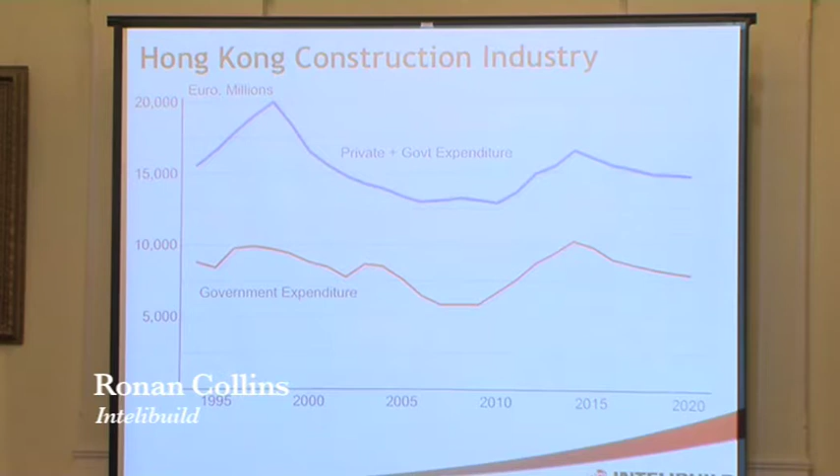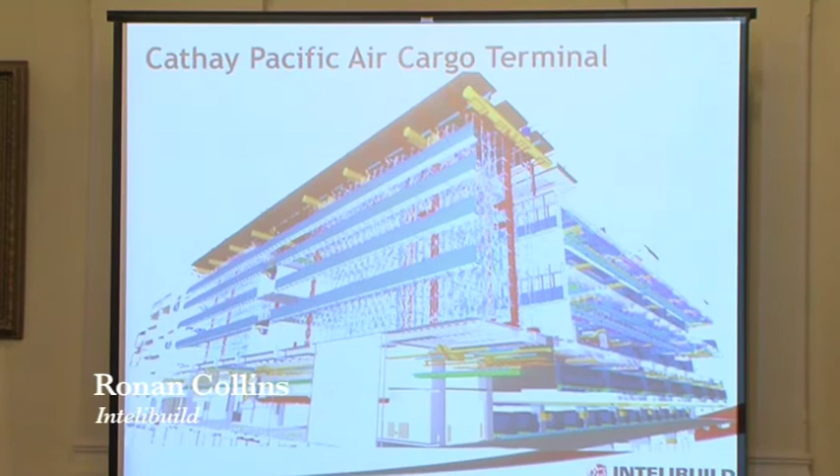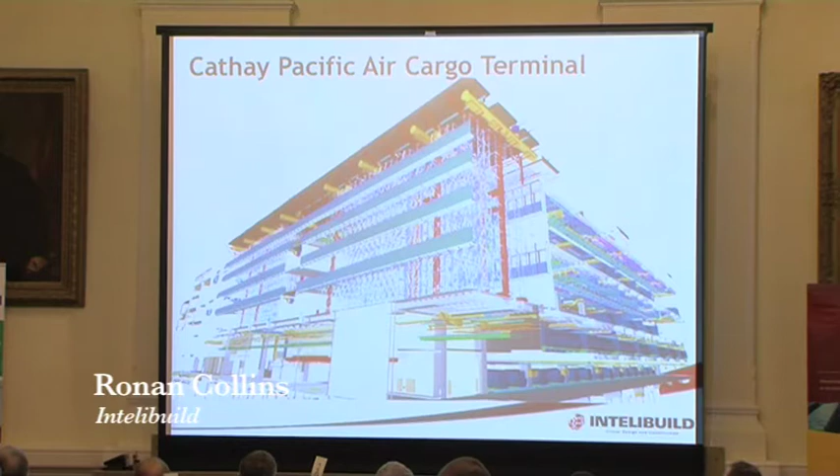So what I'm going to do is share with you how BIM started in Hong Kong, how we've ended up at an Institute of BIM, and some lessons we've learned along the way. A project that will feature heavily in this presentation is the Cathay Pacific Air Cargo Terminal, which was instigated by the client. A key message from this morning is that BIM adoption needs to be driven by the clients - it's got to be led either by the client's project management team, but definitely from the top, to get the most success.

So I'll talk more in detail about the Cathay Cargo job. This is another building which we worked on, called the Goodman Interlink project - it's a 1.2 million square foot logistics warehouse.

So it's used to sort out cargo coming in from the container port and distribute it to airlines around the city to other ports. The client drove the BIM process. This was a little bit different. The client asked a company to provide an independent BIM model.

So the design team continued to operate in a traditional two-dimensional way. The architect did 2D drawings, the engineers did 2D drawings, and then an independent BIM model was created to check what was on those drawings. So it was effectively a coordination check.

So in some projects we find the owner says the architect, the engineer, the contractor must drive the BIM. And on some projects we find that the owner says, okay, that's going to be too difficult, we'll do an independent model as a check on the design coordination.

This is another example. This is a commercial development for a retail center. And again, this was a client-driven initiative. The client had seen other successful developments and said, oh, I'd like to have that.

So we have in Hong Kong what I call the Gucci handbag effect. One developer gets one piece of software, for example, they work with a Gehry Technology platform, and one owner gets immense benefits. So the next owner says, well, I'm developing my new project, I want my Prada handbag, so they go and use a Revit platform. And the next guy goes, no, I need a different handbag, so he ends up with another type of handbag.

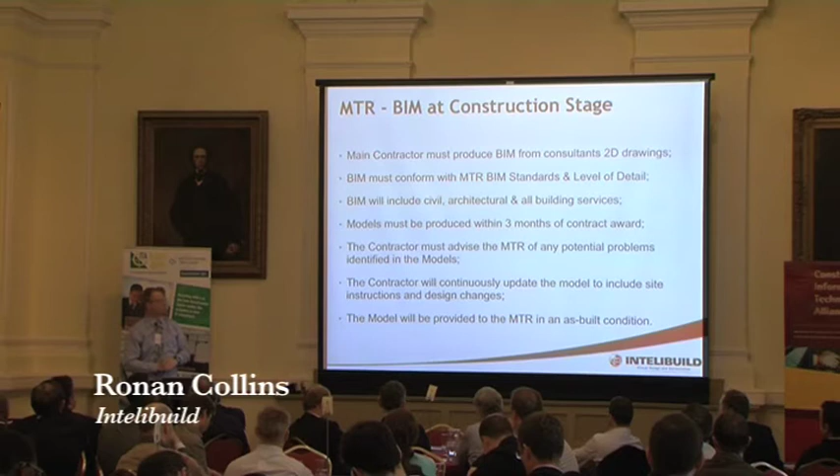The Hong Kong Airport Authority is also looking at BIM. But the Airport Authority have been lucky enough to have a little bit more time in their planning, and they've taken the initiative and said, for our new terminal, the design consultants will operate in BIM. So the Airport Authority, 2.5 years ago, signed a consultancy agreement with Mott MacDonald, Arup, and Aedas Architects for the design of a new airport terminal, and they have to do everything inside of BIM.

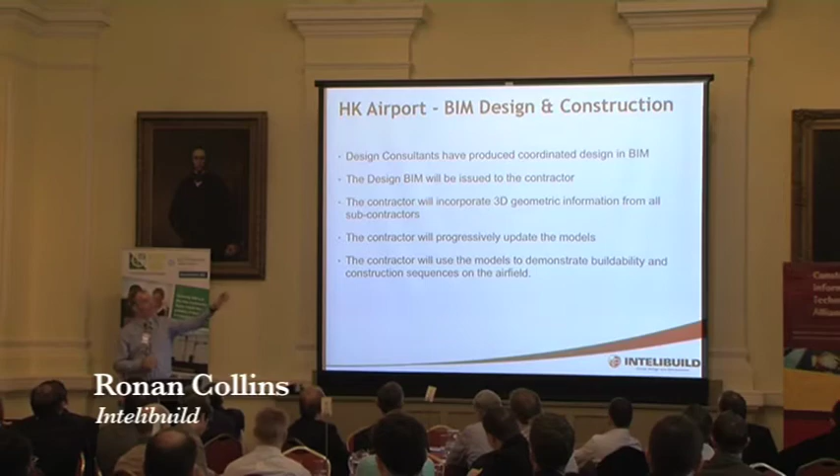A couple of weeks ago, the contract for the construction was awarded. And in the contract for the construction, the Airport Authority have said to the contractor, the design consultants have produced a coordinated design model. So the Airport Authority have driven the consultants to produce a coordinated model. So in Hong Kong, the culture in Hong Kong is very simple: the engineers do a scheme design, the contractors start work as quickly as possible, and the M&E contractors do a lot of coordination on site.

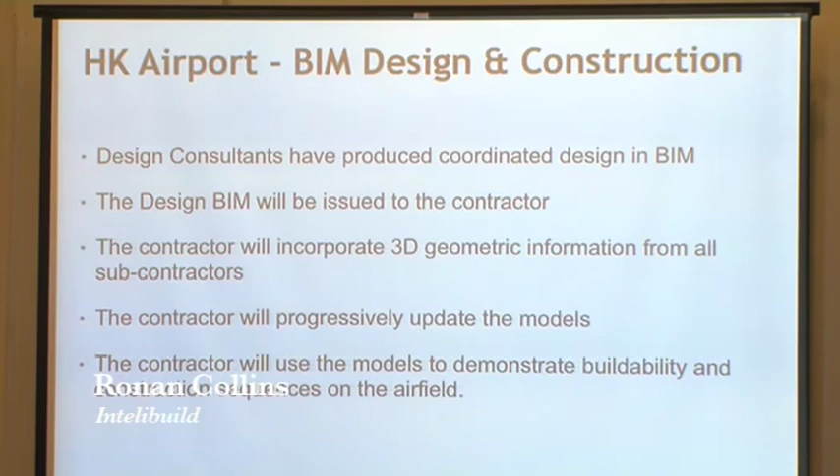The Airport Authority have said, that doesn't work. So we want the E&M coordination done in the design. We're willing to pay for it. We want to use BIM. So they've driven a BIM process for MEP coordination. And then they've said to the contractor, we'll give you the model. Mr. Contractor, we're giving you the model. You must keep it up to date.

So all of your subcontract information, all of your suppliers' information, all of your details from manufacturing must be put into that BIM model. And at the end, you have to give the model back to the Airport Authority. So the Airport Authority will end up with an as-built 3D model of a new airport terminal. They've also said, for the purpose of maintaining and operating the airfield, the contractor will use the models to demonstrate the buildability and construction sequences on the airfield.

So one of the requirements in the specification is, it's not just good enough to show us the pipes fitting in the building. We want to see the delivery of the materials. We want to know when you're going to close certain taxiways. We want to see where the cranes are going to be positioned. We want to understand the whole logistics using the BIM model.

So in these examples, the owners, or semi-private owners, are telling the contractors or telling the architects what they want. And it's driving the industry. So it's not an architect coming along going, hey, we're going to do BIM. It's the industry going, we need to get it done across the board, and changing the whole thing.

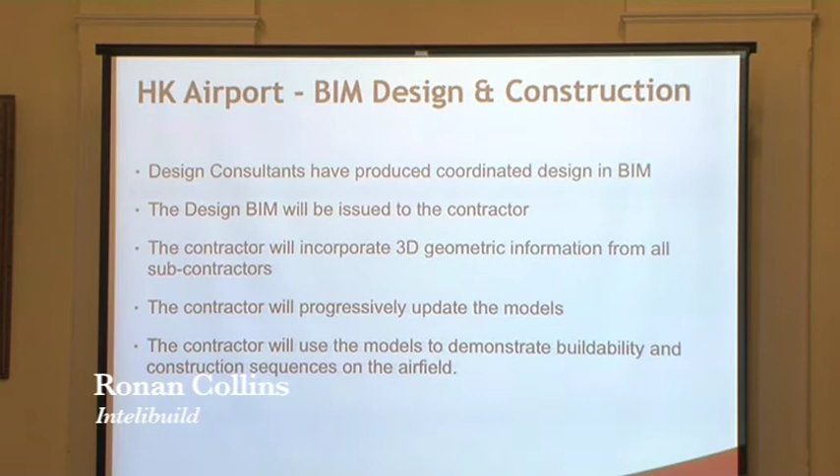And the biggest mover in the industry is the Housing Authority. So the Housing Authority is led by a lady called Miss Ada Fung. And Miss Ada Fung is the first honorary member of the Hong Kong Institute of BIM, because she has solely driven the idea of BIM into the Housing Authority. In Hong Kong, we have 7 million people of a population, and of that population, about 1.8 to 2 million people live in public housing. And these are some typical examples of public housing blocks.

The Housing Authority, on their website, have published their own BIM standards, their own user guides, their own guides for producing components, and their own systems for actually making the models. So the Housing Authority have made it public. We're going to use BIM on all of our projects by 2016. They've created the standards for people to follow, and they're driving the process.

So now all the architectural firms, all the engineering firms, all the M&E firms, all the contractors are all starting to learn BIM, because they have to meet the requirements of the Housing Authority. So they're all trying to learn what BIM is about, how does it work. So we have all these major owners getting into BIM in Hong Kong. So there's a change, a cultural change, a social change happening.

But everybody starts asking the same questions. What is BIM? What does that actually mean? What does a client mean by BIM? How do we implement it? How do we actually make it work? And when do we start doing it? And who's going to manage this process?

So myself and a number of my colleagues in Hong Kong have created and have built up an independent institute called the Institute of BIM. The institute is modelled on the Architectural Institute. So we followed the Hong Kong Institute of Architects template in terms of membership structures, articles of association. It's a registered institute. And we actually have professional grades.

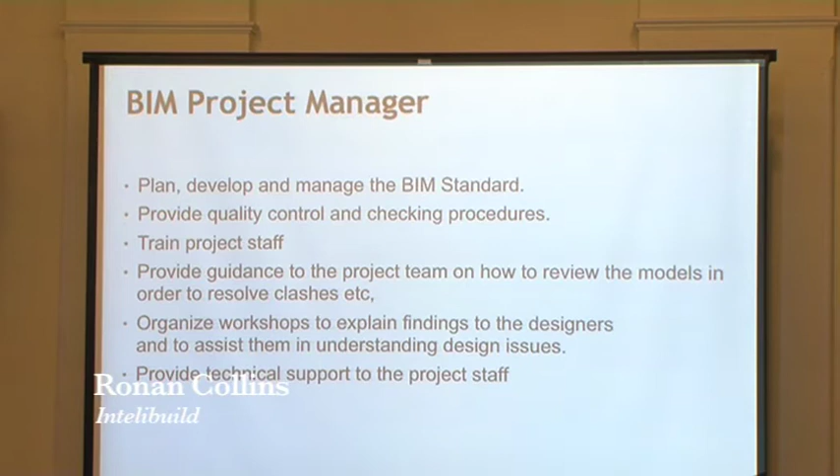Then this guy, the project manager, has to provide guidance to the project team on how to look at the models to resolve clashes, actually go through the process of coordination, organizing workshops, assisting them in understanding design issues, and then providing technical support. Inevitably, there's going to be technical problems. So this is the role of a project manager.

And this fits nicely into the idea that I've put forward in this paper, that there's three key issues in the technology or the implementation of BIM. The first is the people, and that's the most important. The second is the process, and the last is the technology. I'm not going to talk about BIM software or hardware. It's been murdered to death on numerous occasions by all the software vendors about how wonderful their technology is. What we have to focus on is the people and the process. And the people comes back to the training.

So here's my take on the construction industry in Hong Kong and probably in Ireland. We operate in silos. So the architect has their domain, the structural engineer has their domain, and so on and so forth. For BIM to work, we need to collaborate. And I've taken two quotes. The first quote is from Charles Darwin, which is a very old quote, but this is actually in the 2012 UK BIM report. So they've done an analysis in the UK of the adoption of BIM, and this is on the last page of that report. Collaboration is key.

In the Journal for BIM in the US, Turner Construction have said that collaborative project teams have the potential to lead the way in defining the standards for a cost-effective, predictable project delivery. The key benefit to BIM is knowing what it's going to cost and knowing when it's going to get delivered. That's the key underlying benefit of BIM. So you have Charles Darwin from the 1800s and Turner Construction from the 2000s talking about collaboration.

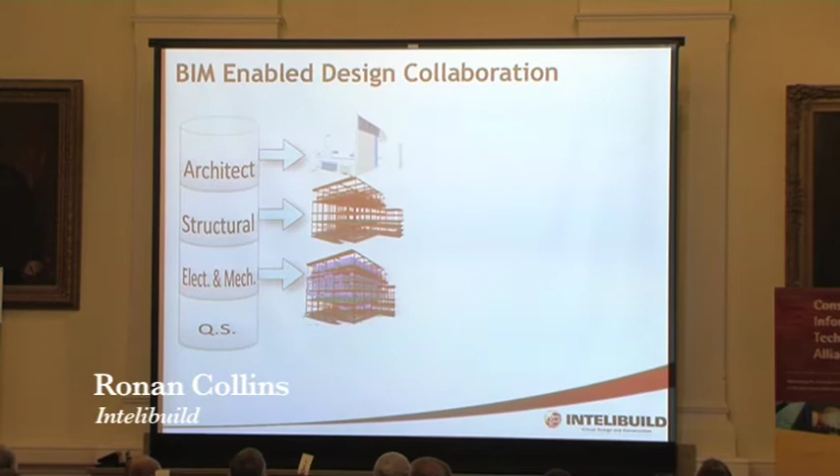So how does BIM enable collaboration? You first of all have to have a contract which enables collaboration. BIM will not work in a traditional risk litigation style contract. So if you're in a contract which is do the least amount of work and shed the maximum amount of risk, BIM is the wrong system. BIM is not going to create a collaboration environment.

If the contract is written in some collaborative manner in terms of partnering, sharing, alliancing, IPD, whatever you want to call it, BIM will enable that process. But BIM will not create the process. So if you have an argumentative style agreement, BIM is not going to fix that problem. But if you have a collaboration style agreement, BIM can enable that process.

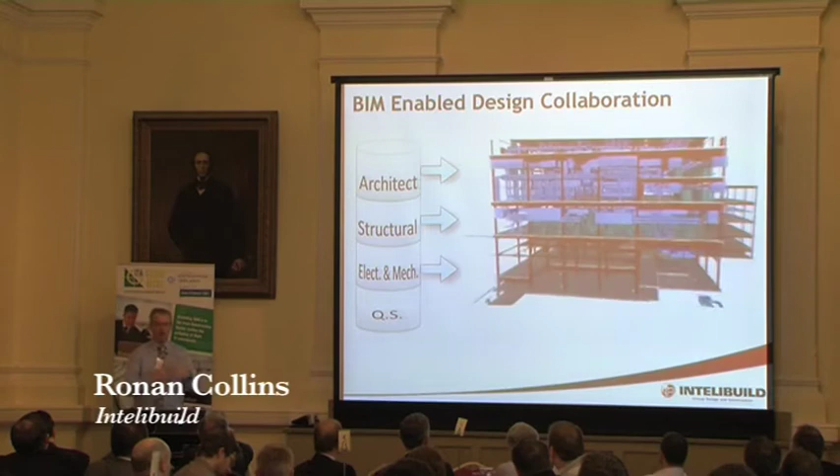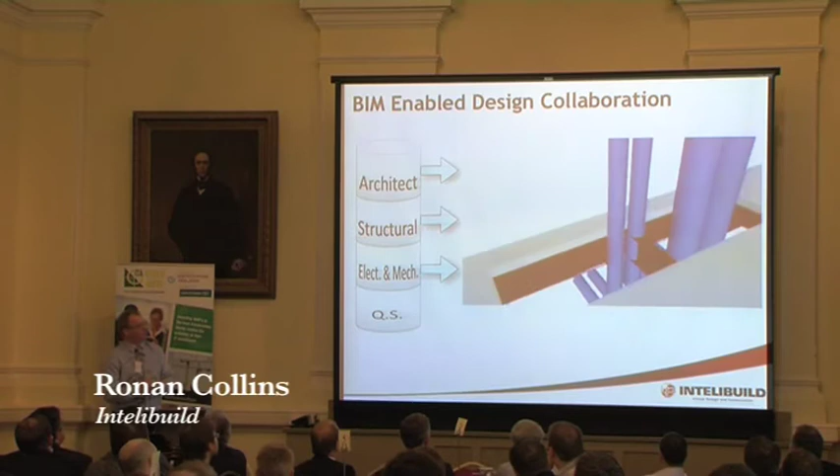So when we start doing BIM, we want the architect, the structural, and the electrical to collaborate. So we want them to build their own models, but then we want them to look at the models and start solving problems. So this is an example of a power plant or an energy plant. And it's showing simple things like a pipe clashing with a beam. This is stuff we see every day of the week, every job we work on. The next example, with the camera flying around, is a piece of ductwork hitting a column.

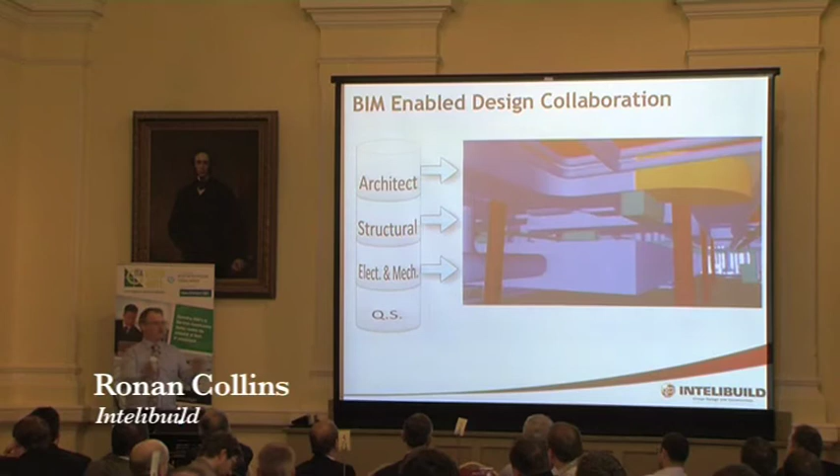Okay? In a collaboration style arrangement, these guys have to solve these problems. But what we're finding is they're not looking for the problems. So one guy is making a ductwork model, one guy's making a steel model, one guy's making an architecture model. I'm done. I've made my models, I'm finished. But who's actually looking at the coordination? Who's actually looking at the collaboration? So we have a very interesting lesson that we learned.

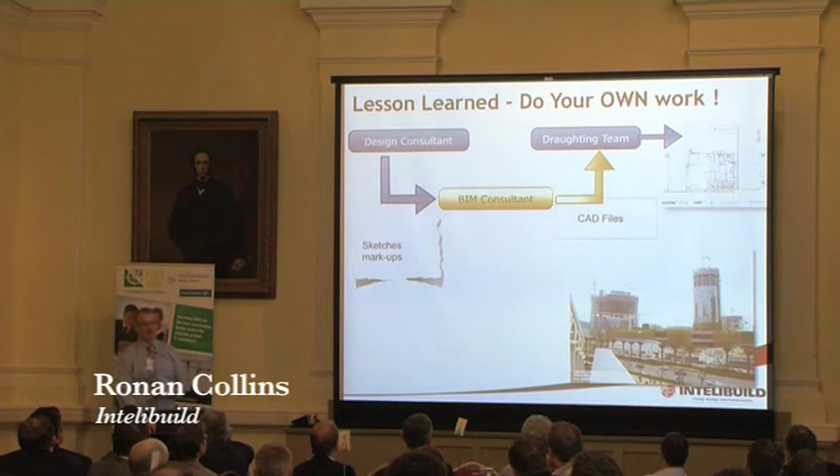So you had the situation where you had the designer, an external party, and then the drafting team for the same designer. You can imagine what happened. When these drawings were late, who do you think the architect blamed for the late delivery of the documents? It wasn't the designers. It was the poor donkey driving the BIM authoring software. So the experience that we had on this City of Dreams was we were trying to get involved as an independent company in the procedure of an architect generating drawings, because they couldn't get up to speed on the software. Oh, it's too difficult to learn, it's going to take too much time to figure out, it's never going to work. So the learning is never put a BIM consultant between an architect and his drawings.

The architect has to learn the technology, and the architect has to produce his own drawings. And the same stands for the engineers and the MEP engineers. If you want to appoint a BIM consultant to enable them, let the BIM consultant do the training, let them provide technical support, let them second staff to the architect's office, and let them do planning for the actual BIM works, but do not let the BIM consultant be responsible for the production of the drawings, because the BIM consultant will go bankrupt, which is what nearly happened to us.

So, you've got the people, now you have to figure out what we're going to put into the BIM model. In terms of change management, or in terms of process management, you have to rethink how you design and document a building. Okay, the days of getting a drawing rushed out on a Friday afternoon to meet a tender deadline is not the right way to work a BIM model. You cannot rapidly produce these 3D models. It takes time, it takes effort. So what we say is you have to define what is in this model.

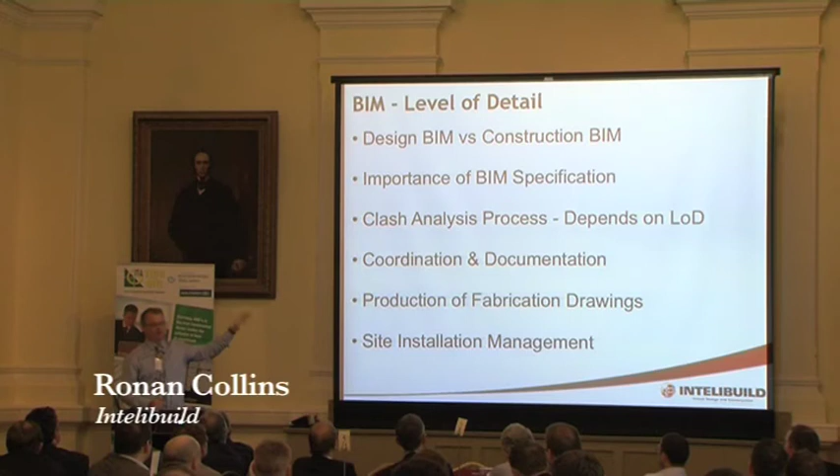So when we started this project, the Cathay Pacific cargo terminal, to give you a sense of scale, there's 2.6 million tons per annum going through this cargo terminal, or there will be next year when it opens. A cargo plane carries 110 tons of cargo. And here was the learning I had on this contract. Every time you go on your holidays, there's 20 tons of cargo on top of all your baggage in the plane. So every airline operator is moving cargo on every single aircraft.

So this aircraft terminal will deal with 75 flights per day. So the air cargo terminal is designed for these numbers. Okay? It's not an architectural masterpiece. It's not a structural engineering phenomenon. It's designed to handle 75 flights per day.

Same image as before. The client wrote 3 lines in the design specification. The design team must use BIM for the coordination of the air cargo terminal. Full stop. Please submit a BIM plan with your tender submission. Full stop. That was it. There was no specification, there was no project plan, there was no level of detail, there was nothing. 5 years ago. There was an aspiration from the client to use BIM. And they had no idea how to make it work.

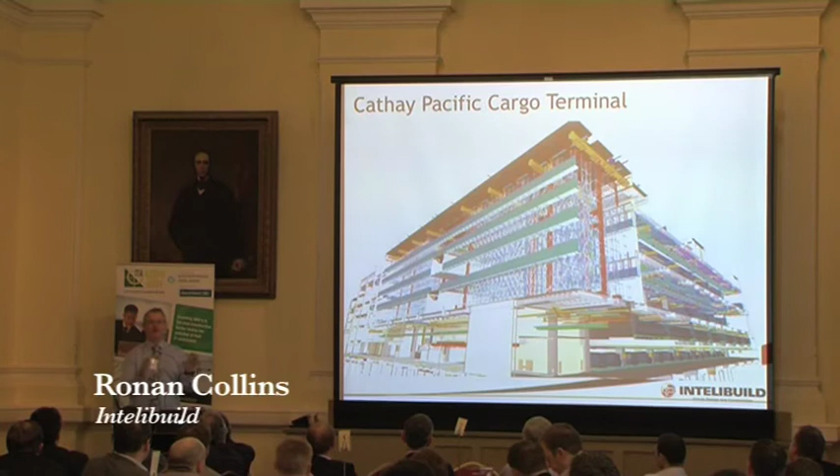So the architect was appointed. And this is the generic shape of the building. The design team was led by an engineering firm called Meinhardt, and they collaborated with Aedas architects, and they engaged us to support them in the BIM initiative. The architect did all their own BIM modeling with no help from external parties. And we had discussions about coordinate systems, origin points, naming conventions, and the architect said, no, I'm doing it my way. So the architect did it his way.

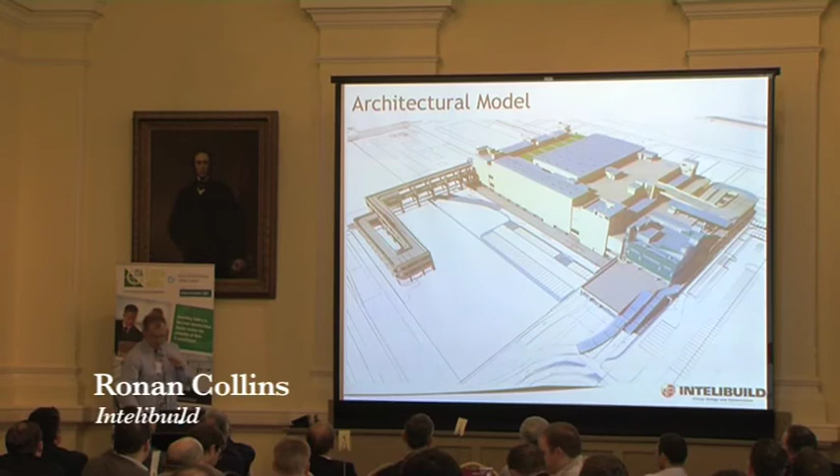What we learned was we should have had one of these. This is in the BIM project specification under the Hong Kong IBIM. We've now listed out pretty much every component that you have in a building, and we've identified what codes are needed in the model. Materials, type codes, size, and performance criteria. So now we sit down at the beginning of a project. Instead of the architect just doing it his way, we actually say, do we need all of these systems? And if we do, what level of detail are we going to go to?

So we now have a whole menu of every building component that you need, and we identify whether we need to put it in the model or not. On certain projects they're not relevant, on certain projects it's not important, but generally speaking we go through the process. The act of going through the process of determining what goes in the BIM model gets people thinking about how much coordination they have to do.

When it comes to the structure, we had a bit more success. The structure engineer had never done BIM before. The architect had done BIM on a previous project, so they knew what they were doing. It's fantastic. The structure engineer had never done it. So we were able to guide them: we need to be able to take the steel and give it to the fabricator. So we were actually successfully able to model the steel at the design stage and then give it to the fabricator.

It would have worked except for one cultural problem. The structural engineer refused to give his model to the contractor. And to this day I've never figured out exactly why he refused. But there was a perception that there was something wrong or there was some risk associated with giving the model to the contractor. So the contractor took the 2D drawings that this model was used to generate and remodeled into 3D in a different platform to do steel detailing.

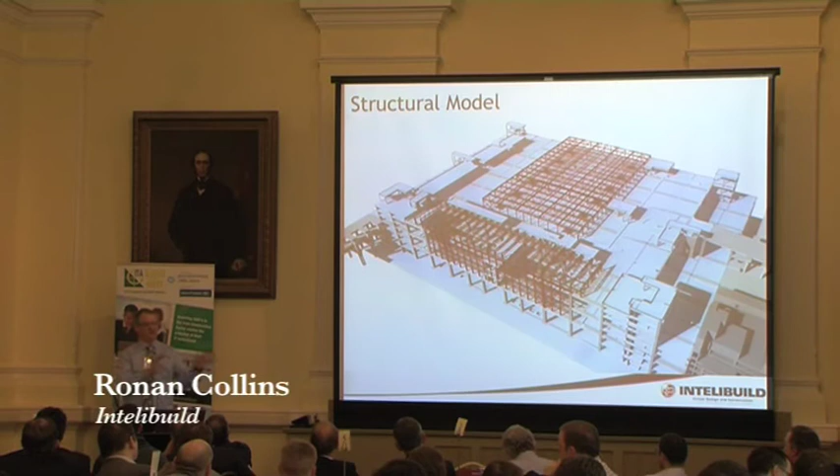Because the contractors get more value from a model, even if it's not 100% correct, than from no model at all. But the engineers perceive that by issuing a CAD file, that if there's a geometry problem or there's a dimension problem, they're going to get their asses sued. So if you have an arrangement between the engineer and the contractor who says, look, you can have my model, but it's not my responsibility, and the contractor goes, give me the model and we're not going to come back after you, then you have this relationship that works. So that was the issue with this one.

In the structural framing model, we actually managed to label things. So we actually managed to label every element by its position in the building, its type, and its certain scale, so we could quantify the building. So we were able to tell the QS all the different quantities in the model.

The QSs, excuse me, I'm going to get water for a second.

That's better. The QS was another interesting cultural shock. The QS, we would give them a spreadsheet and say, right, here's all the concrete, here's all the steel. I'm not using those numbers. I said, what's wrong with these numbers? Oh, I don't trust the BIM model. So the QSs don't trust the information coming out of the BIM model. So again, at the beginning, if you're going to use the model for quantities, you need to sit down and get all parties to agree what information is required by the QS for their work.

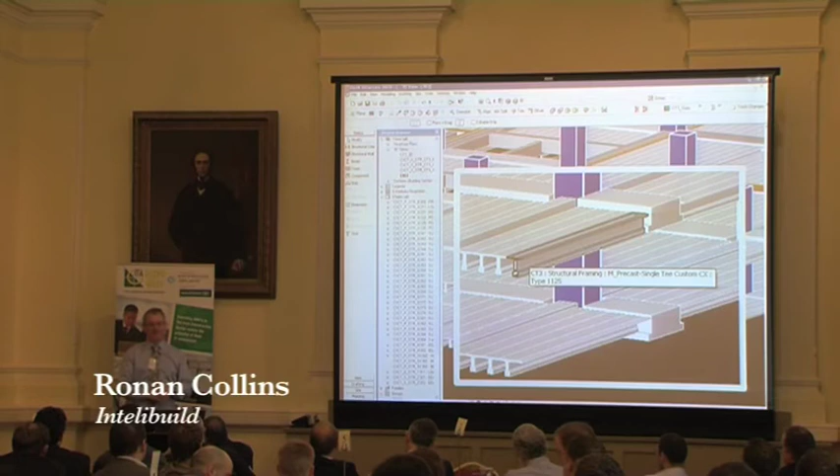Because if you just do your BIM model and then email the QS a spreadsheet going, hey, look at this, I've got all this wonderful information out of the BIM model, QS is going to go, nah. And he's going to take out the 2D drawings and measure all the 2D drawings. So the culture is the QS doesn't trust the engineer to build the model correctly. So you have to get past that as well.

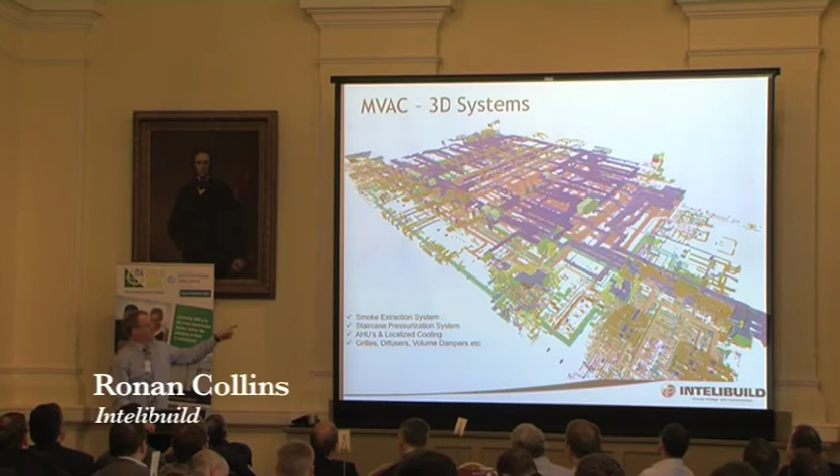And here's the fun part. This is the M&E component. This is the mechanical ventilation system. Smoke extract, staircase pressurization. We have come up with an E&M naming system. We have an electrical system. Again, we have a naming convention. And we get to a fire sprinkler system.

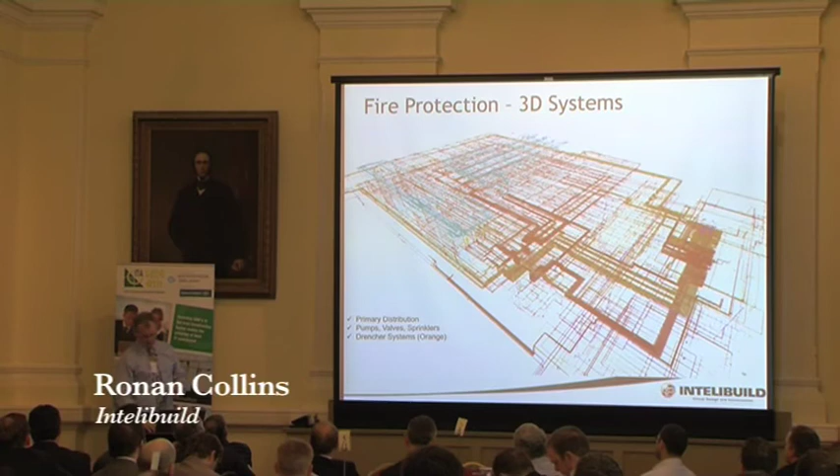In Hong Kong, the culture of the E&M consultants is fascinating. They will do the least amount of work possible to issue specifications to the contractors to do all the E&M coordination. In the US marketplace, the US contract has written that the E&M designer has to make everything fit in the building. The contractor in the US, all he has to do is install. In Hong Kong, they have to take scheme drawings and actually do all the coordination on site. So I'll show you some sequences from the slides. So the consultants are working to a very rough level of detail.

So you have all these models. Then you have to figure out the roles of the people involved. So you have the culture of the silo. You have the architect, I'm doing my thing, structural engineer doing my thing, and then you get this poor unfortunate BIM project manager who has all these models, and his job is to coordinate them. So you're looking for things like spatial arrangement.

Can I walk into the plant room? Can I take the filter out of the ductwork? And can I replace a pump? The BIM consultants are looking for these problems - not the architect, not the mechanical engineer, not the structural engineer, but the BIM consultant, because they're thinking about the operation of the facility. How do I know that's coordinated? How do we actually know? How does an architect stand up in front of his client and say we've done BIM, everything's coordinated, it's sorted? How does that actually happen? Who's going to take responsibility for standing up and saying it's coordinated?

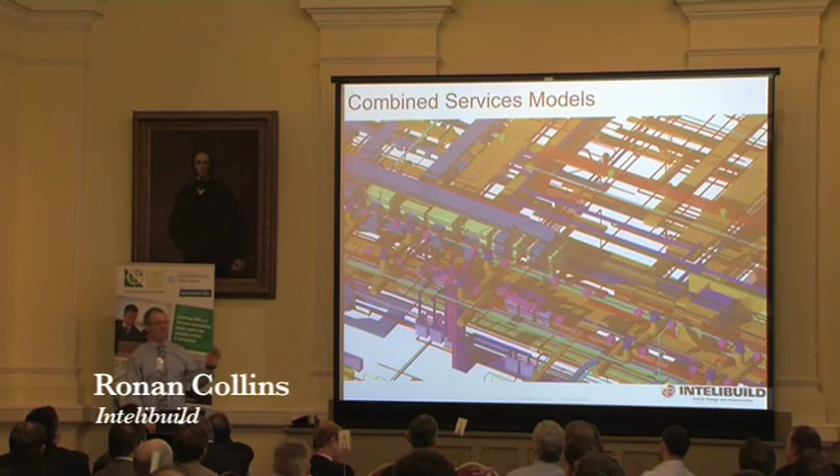So what we've done is we've developed a system we call a clash detection matrix, and it's a hierarchical system. Let me get this to a pointer.

Here you have operating requirements for a terminal. The owner wants certain headrooms in certain areas for trucks, deliveries and everything else. The cargo operator wants certain operational requirements. Then there's a structural requirement, then an architectural requirement - note the architect comes after the structural engineer - and then finally the E&M component.

We start off checking that the operational headrooms have not been compromised by the structural framing. We then check whether the drainage compromises the headrooms, whether the HVAC affects the operation of the plant, and so on.

We eventually get down to checking if a piece of pipework is clashing with a piece of ductwork. To go through this process on this job took nearly nine months, and it's an iterative process. So you think you've cracked it, you go all the way down, you move some pipework and ductwork, run the analysis again, and find out you just caused another problem back here. You run the analysis, run the analysis, run the analysis.

You do not want to be doing this in an ad hoc, bit-by-bit manner, which is what we started off doing. We quickly realized if you don't plan out this procedure, you're going to end up wasting thousands of hours just checking models randomly. So the learning from this was you have to create an analysis system.

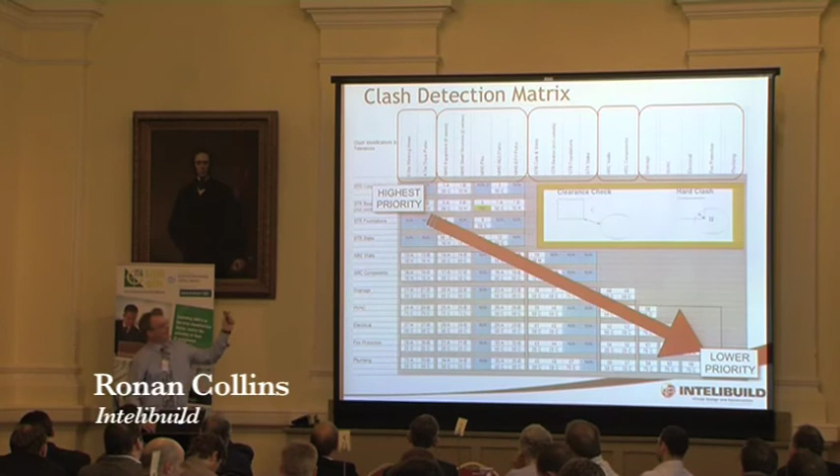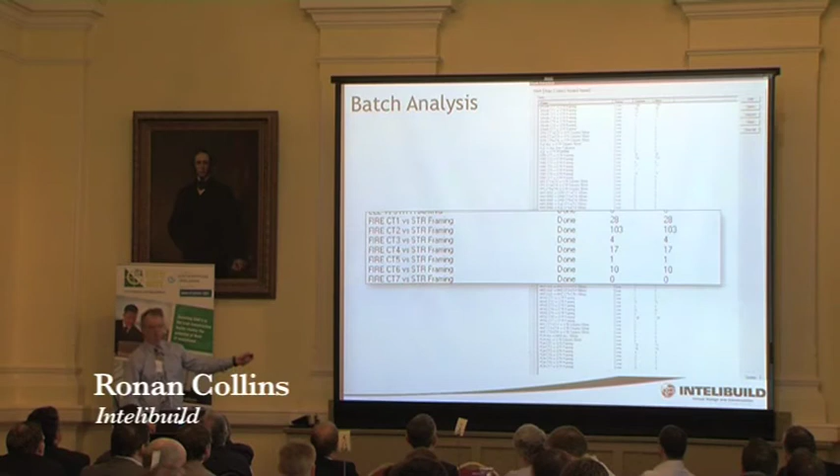So we start creating these batch systems, using the software to batch out and analyze this automatically. We can take out fire sprinklers versus framing, and we can do it by level, checking each individual level to make sure we're identifying all the problems.

We use a piece of software called Navisworks, and this is the interface. So we can find out where the pipes are clashing against the framing. Brilliant, we're sorted, we know where the problems are.

We're done. And then you go, now we have another problem. We can find these problems and show them to a junior engineer, or to the guy making the BIM models. Can we get the senior engineer to actually sit down and deal with these problems?

The first thing is the senior engineer sits down with a machine. The senior engineer says, we have to relocate these pipes. Well, where are those pipes? Where's that on a 2D drawing? So the first thing the engineer thinks of is a 2D drawing.

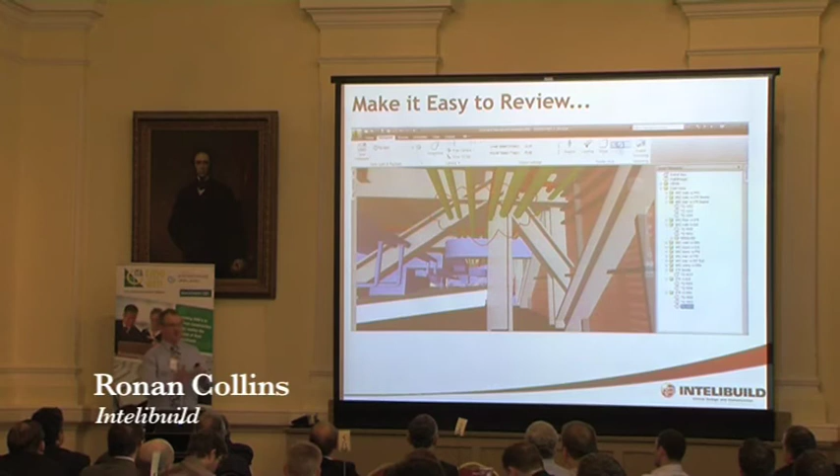So what we've done now is we start marking up 2D drawings - I don't have an example here - and then they start to realize what the problems were.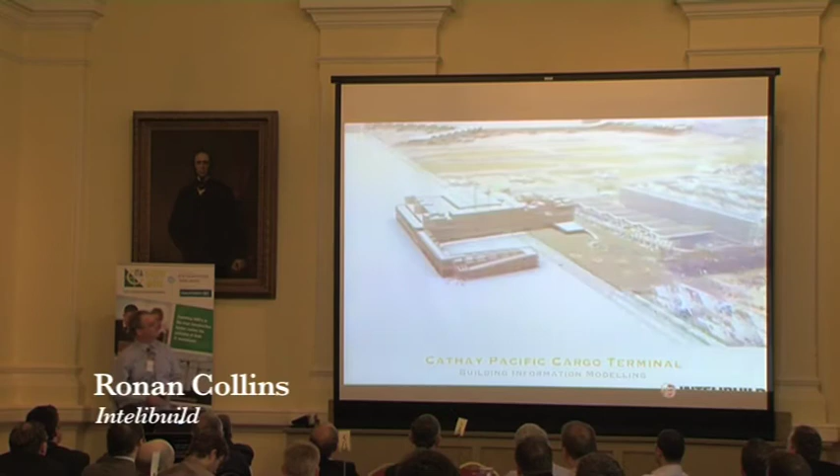But then we quickly realized that for any measure of success, you have to take them - this is an example of the building - into the building and walk them around one by one.

So this is just showing, very quickly, the delivery of cargo into the building - just a little graphic to fill the time. The whole system is automated, so all the cargo is moving around on these automatic rollers, and then it's going off to the planes.

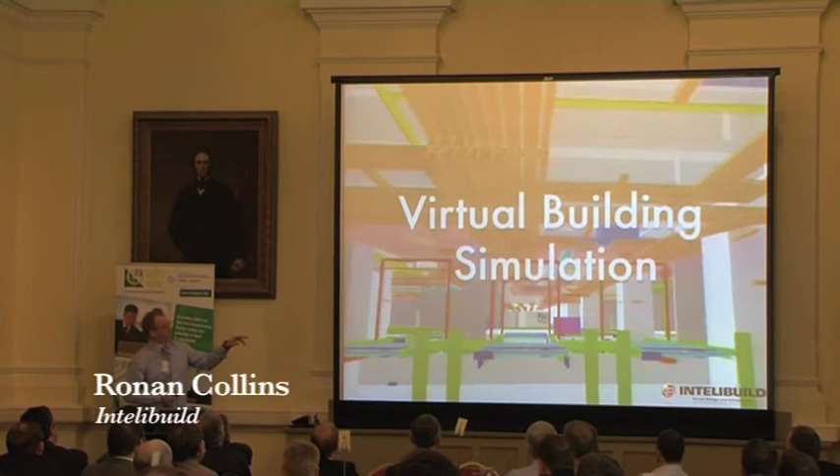So from a BIM system, what we're doing is sitting down with the engineers and walking them through the building. Let's see if this works.

Technology never works when you want it to.

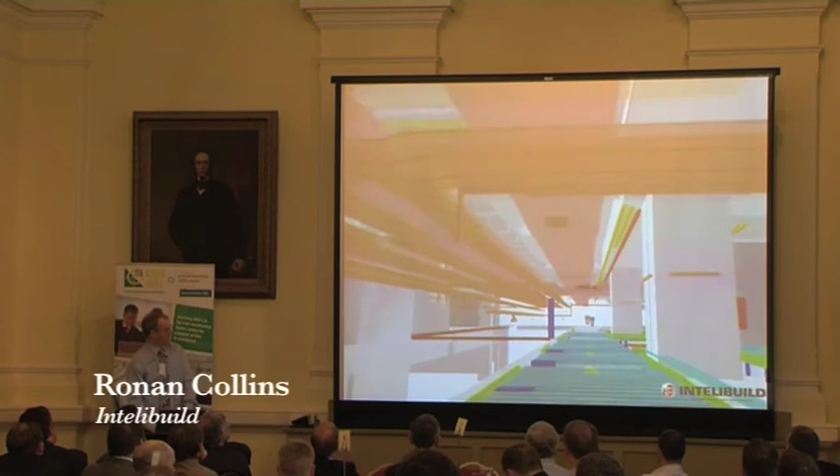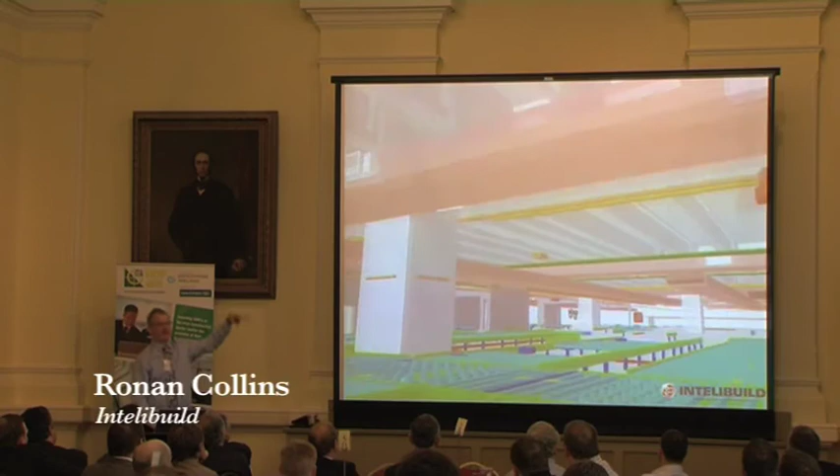So the software will tell us where we have problems. Here we've got a clash between a camera and a duct. Here we have the warehouse area, so you can get a sense of the warehouse. Luckily this building has very high headroom, so the coordination was not that difficult in certain areas.

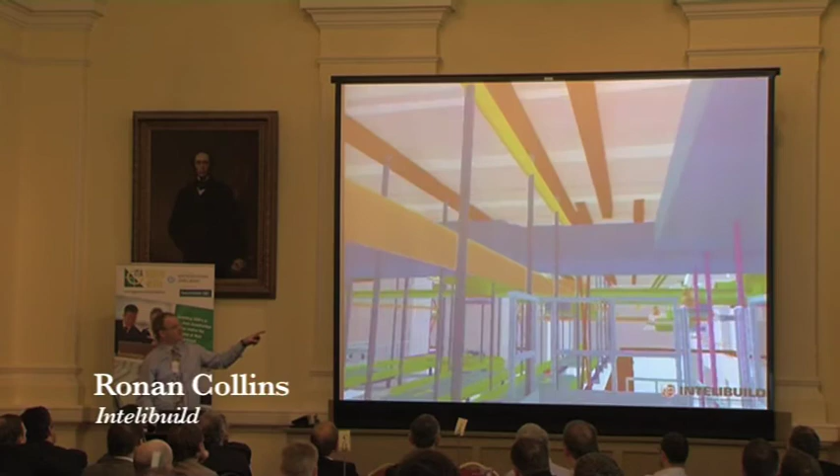But all of these models were all built by different contractors. This is the construction stage model, and they've started putting in some steelwork for maintenance access. We suddenly realized that the steelwork for the access was causing a new coordination problem. The steelwork hangers were causing problems with ductwork.

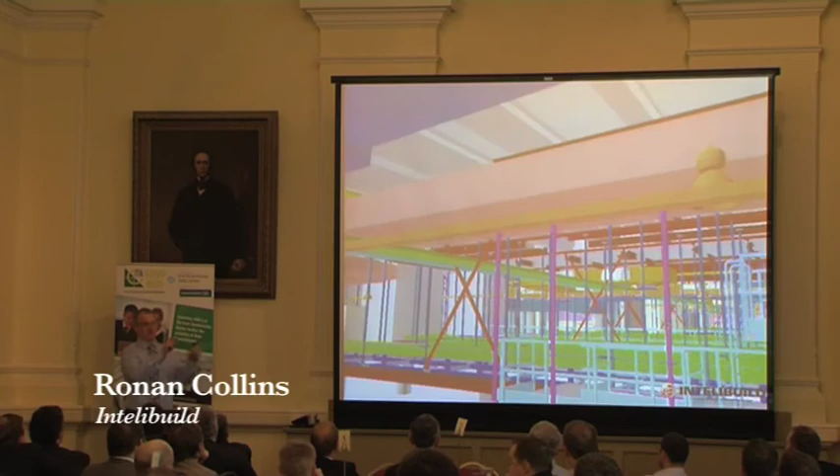Now we can spend all day walking around these models showing people clashes, but that doesn't actually get them resolved. So you can find hangers clashing with pipes and everything else.

It means that the BIM consultants are doing a lot of work to communicate the problem back to the designers. So what we're finding is that it's very good having all these 3D models, it's fantastic doing the clash analysis, but you have to put in a lot of work to be able to communicate where all the problems are to get them solved.

So this is why we've got all these procedures that we have to go through. Now you can imagine the reaction when a BIM consultant, who the industry thinks is a software guy, turns up and starts telling mechanical engineers and structural engineers that the design doesn't work. The reaction is not very positive.

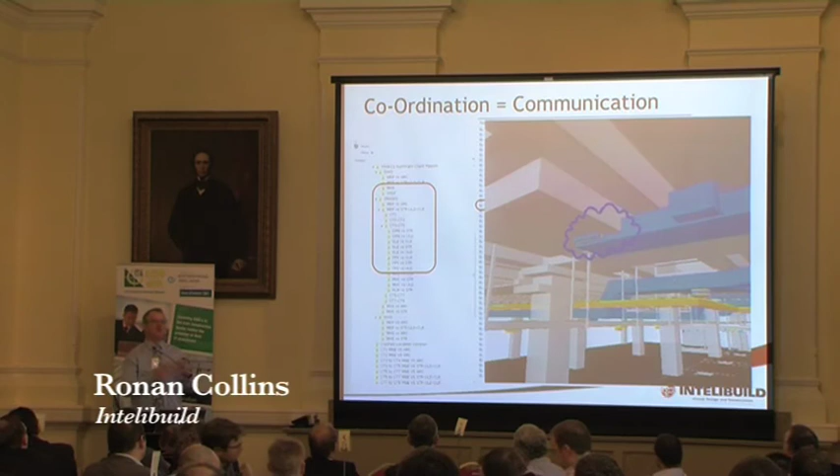So we've had to be very diplomatic in how we actually explain some of these problems to some of these very sensitive designers. So what we've done is we've actually created a system where for every single drawing we create this printout. So you have a two-dimensional drawing which the architect can relate to and the engineer can relate to, and a 3D snapshot saying this is what the problem looks like in 3D.

And then we have to go through a workshop, and we're now running on one of our jobs a workshop twice a week. So on a Tuesday and a Thursday we get all the parties in a room and we spend the whole afternoon going through an area of the building, resolving clashes, resolving coordination issues, everything else.

And it's set up in a very particular way. We say this is a collaboration discussion. You're not allowed to take minutes. You're not allowed to come back and sue my ass. All you have to do is sit down and work out these problems. But you have to do it collaboratively.

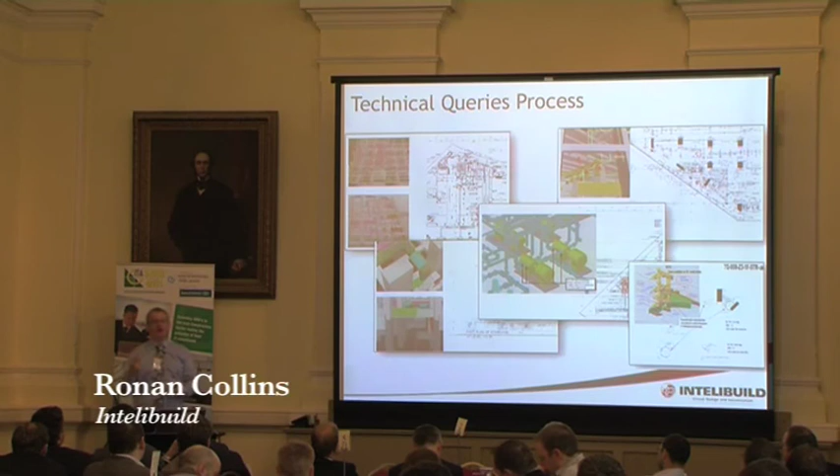So somebody's going to have to move a pipe, someone's going to have to move a bit of duct, someone's going to have to rearrange some wall panels, someone's going to have to lower some ceilings. But as a team, we have to collaborate and organize it. So our guys are orchestrating this collaborative style workshop.

And then we can produce these reports. We can actually produce reports which say, it's like getting a health check. The building is okay, or you've got a serious health problem, or you need to take some serious medicine. So we can actually give a report about how healthy your design is.

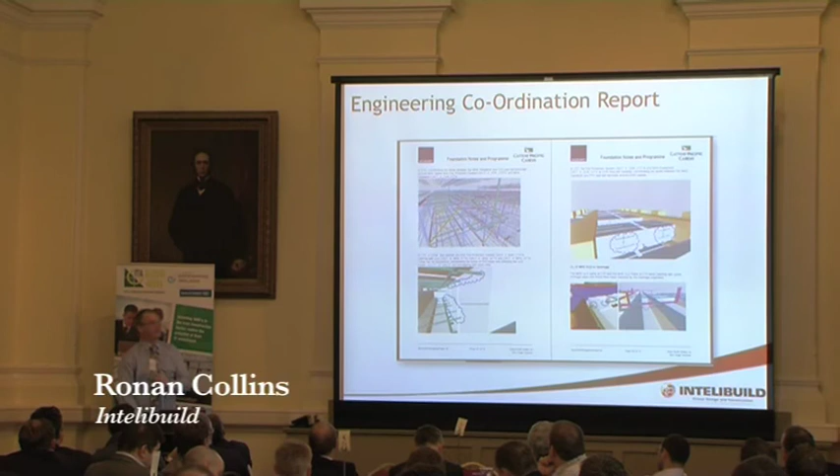But the collaboration and the management of that is very, very interesting. And the social interaction between the architect, the structural engineers, the contractors, and the BIM consultant is key to that success. So we've spoken about the designers at length. What about our friend, the contractors?

So one of the issues we have is this cultural issue of 'I'm not giving my files to those guys.' We live in an industry where it's those guys and us guys, or as I call it, trench warfare. These guys on this side of the trench don't want to give their files to the guys on the other side of the trench, and vice versa.

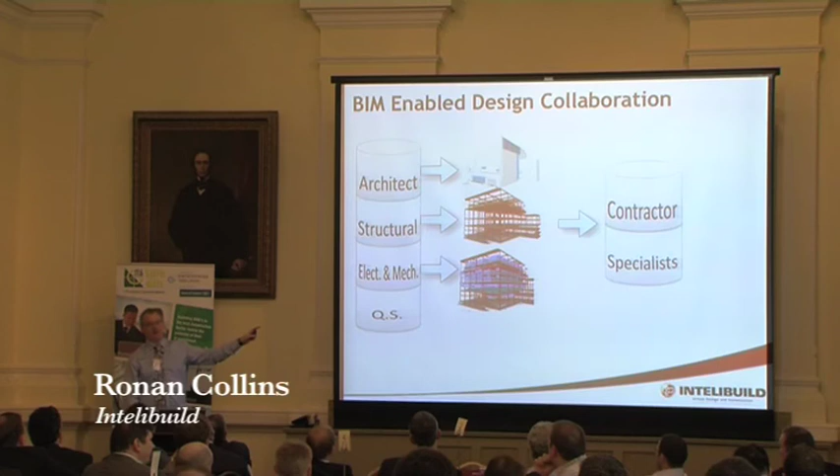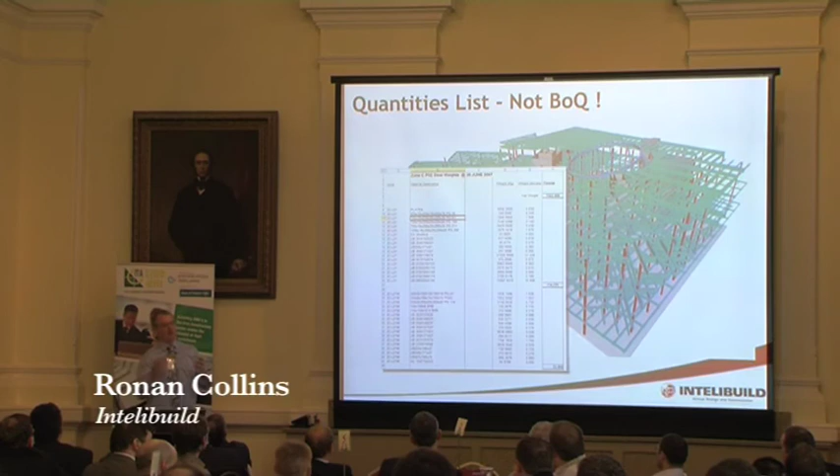So we're now brokering deals where the consultants have to issue their files, lock, stock and barrel, to the contractors. Once the contractors get them, they can use them for quantities. The contractors want to know what the quantities are, even if the QS doesn't. The contractors want to pull out all the quantities and get a sense of how much concrete, how much steel, how many meters of pipe, numbers of pumps, etc., etc.

When we went to site, this is the Cathay Pacific cargo site on site. So this is the main cargo terminal, and you can see the airfield behind. We're on site. I got asked a question: does the BIM model reflect what's happening on site?

I said, well, hang on. The BIM model is driving what's going on site, so the ductwork in the 3D model should be the same as the ductwork on site. So I asked the E&M site engineer to go out and take photographs and compare them to the 3D model.

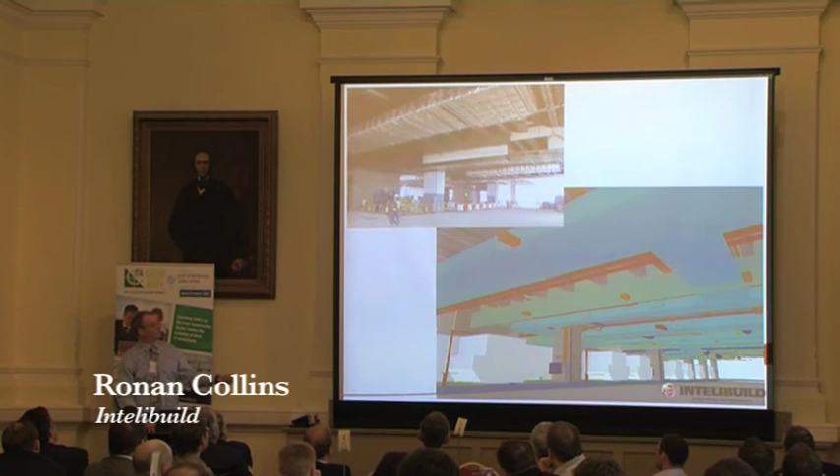Here you can see an area of the operating warehouse. These are gypsum panels for smoke barriers. There's an opening here which is not a missing piece of gypsum - it's actually for a connecting piece of ductwork. So we were using the 3D model to generate the actual cut drawings or shop drawings for all these panels, and we were setting out the ductwork in 3D.

This is an area of the building, very early on, but you can see the amount of servicing required going into the building. So the contractor started looking at site photographs and then looking at the 3D model, saying oh my God, I've got to put this in. So it became a very useful tool for them to understand the construction.

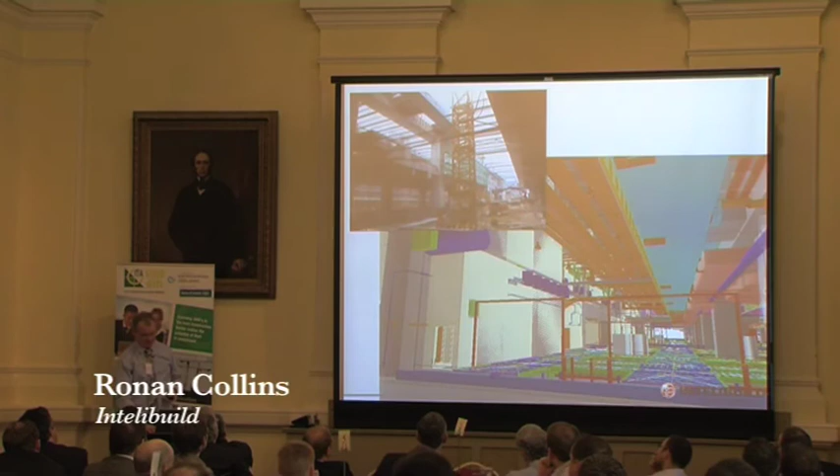Here's another photograph of the construction site, and here you can see they've got a health and safety issue. They have a double height space and they have to install cable trays, sprinkler pipes and other sprinkler pipes here in a very high volume space. You can get a sense of it here. The contractor quickly realized it was a safety issue, so they started thinking about how are we going to scaffold this up, how are we going to get access, etc.

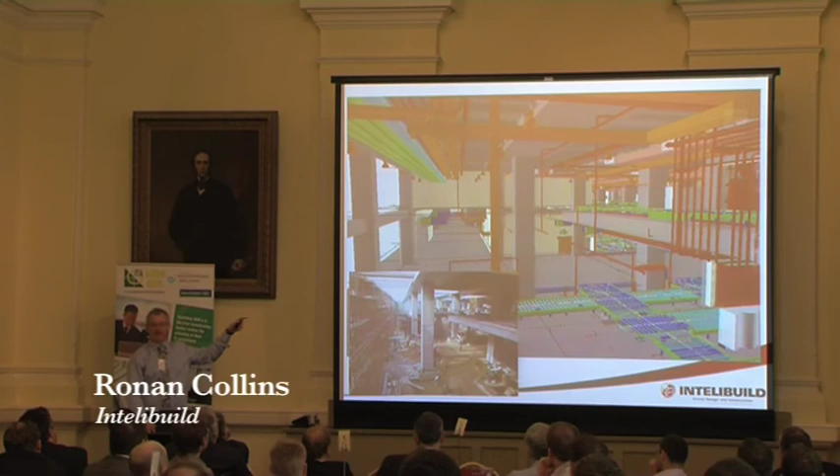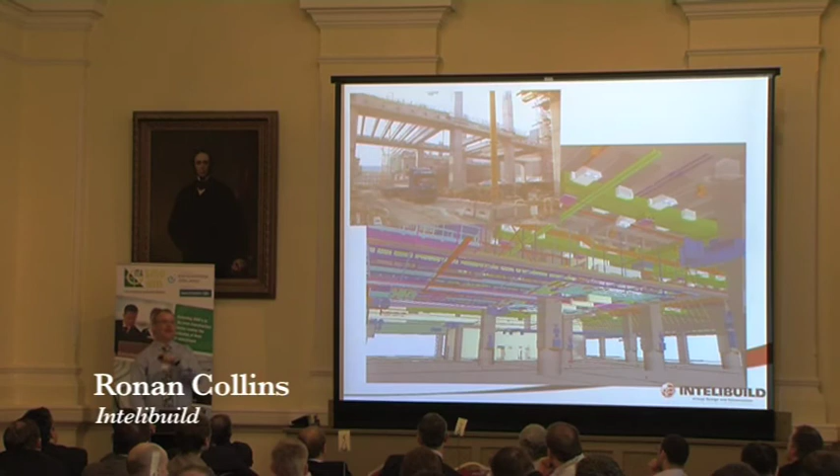This one just shows the level of detail. This is a different problem - this area here is a steelwork platform hanging from a concrete structure, and this clearance is 8 or 9 meters. So again, the installation of this steelwork became a headache in terms of the logistics of building the building. The BIM model created by the design team enabled the contractor to plan out their works much more successfully. The contractor was able to rely on the level of detail in the model to enable them to build the building. So they knew that the model was right, which then allowed them to build the building.

This just shows the cable trays, so you can see all the different formats. Now here's the funny story.

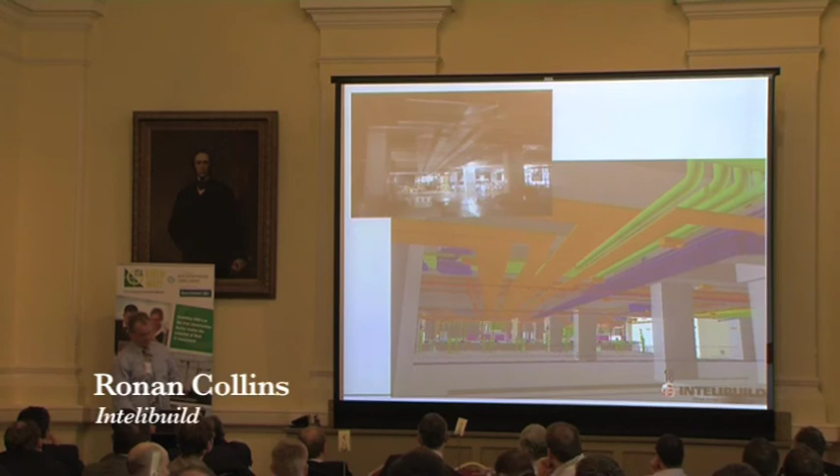I got a phone call one afternoon - Ronan, the BIM model is wrong, it's completely rubbish. I said, why? He said, well, we've put in a ductwork and it's clashing with all the cable trays, it's blocking the sprinkler pipes, blah, blah, blah. I said, well, hang on a second, can you send me a photograph?

So I got this photo - this is not the actual photograph, I got a similar photograph. I said tell me what grid lines you're looking at. So I get an email, grid line this, ductwork here. I open the 3D model, get to the same point, and the ductwork in the 3D model is on the left-hand side of the columns, as it is here. But on the site photograph, the ductwork's on the right-hand side of the column. This ductwork's 2 meters wide and a half meter deep.

And all this happened on the Saturday morning after a couple of pints. The surveyor had put the ductwork layout lines on the wrong side of the columns. The install team went in and put the ductwork in exactly as the lineouts, and the BIM model was right. So the culture is, the 3D model must be wrong - there can't be a way the guy on site made a mistake. That never happened. But it took us a whole day to figure out what the actual problem was, and it came down to a guy with a hangover putting the line on the ground in the wrong place. They pulled down the ductwork, put it in the right place, end of problems.

So the initial reaction, the initial kind of culture, is to blame the guy with the technology. He's got to have it wrong - get him down here, get him here, spend a few hours, get him to fix it. But the actual problem was the site problem.

So you can see the ductwork lined up in the computer model, and you can see where they put it in the right place. The most interesting thing from this project was the contract project director, old school construction guy, was completely anti-BIM. Oh, this is bullshit, it's going to waste time, and all this fancy 3D model, da-da-da-da. He's now making use of it on other projects because he can see the benefit.

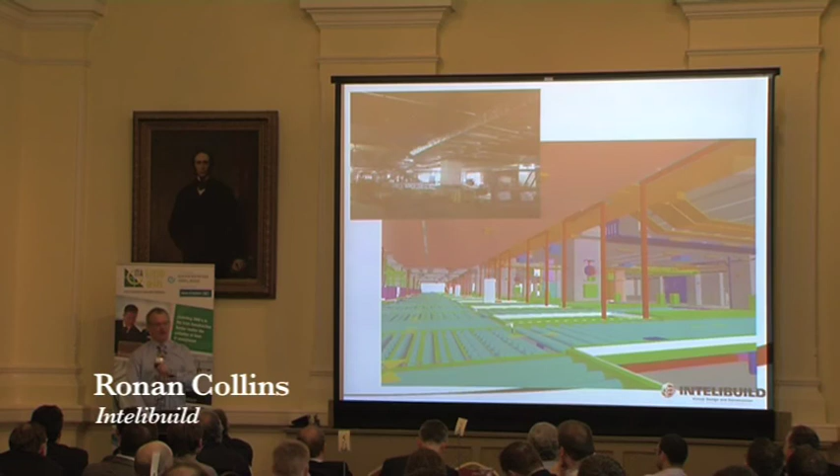So I asked him recently, I said, how much money did you save because of the BIM process? No idea. I said, how much money did you think you saved? No idea. I said, okay, how do I measure how much money we saved? You'd have to build 2 buildings, one with BIM, one without BIM. I said, we're not going to be doing 2 buildings, one with BIM, one without BIM.

So after half an hour of discussing it, it came out, the 2 key issues. One was there was less coring on site. There was less actual reworking on site. Now, I don't know how you actually price that, but there's less reworking. But the one that I found fascinating was there wasn't a queue of contractors at my front door on a Monday morning.

He was so used to, and this, everybody blaming everybody else's culture, that he would have 3 or 4 subcontractors standing at his front door on a Monday morning going, he's done this, and he hasn't done that, and I haven't got this, and I can't get this, and blah, blah, blah. He didn't have that problem. They all knew what they were building, they all knew where they were building, and they all got on with it. So it's hard to put a dollar value against the BIM process in certain things, but when a contractor tells you it's valuable, and I'm using it on all my other contracts, there's something there.

The same contractor uses BIM on nearly all their projects, regardless of whether the client wants BIM or not. And I actually suspect, and from what I know of this industry in Ireland, the contractors are taking to this faster than anybody else. And the contractors will start driving. So if the clients don't pick it up, the contractors surely will, because they're the ones that can save the money.

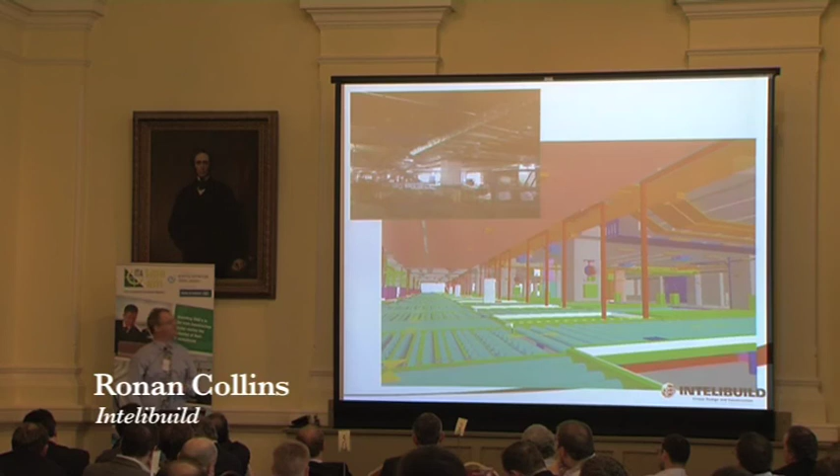A last bit of kind of inspiration for you, if you like. How am I doing for time, by the way? Yeah?

This is in Finland. This is the VTT. It's a technology forum in Finland. They're now looking at design for safety in BIM. So what they're doing is, it's not just good enough to model the structure and model the architecture, model the MEP. They're now modeling formwork systems. So they're putting into the design model the formwork systems, and they're looking at the formwork installation.

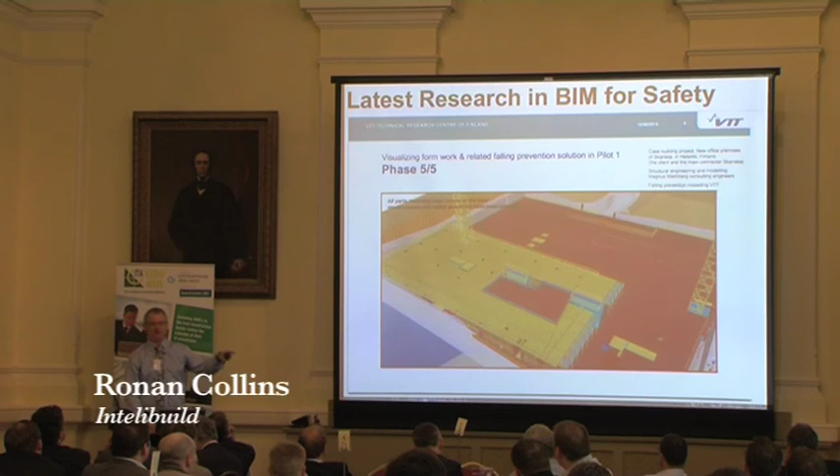So they're actually looking at, in the design stage, this is not on site, this is during the design stage, where the formwork needs to be, where the handrails need to be, etc. And then in the actual BIM authoring software, they're modeling all the required handrails, all the required fixing points, and then putting them on the design drawing.

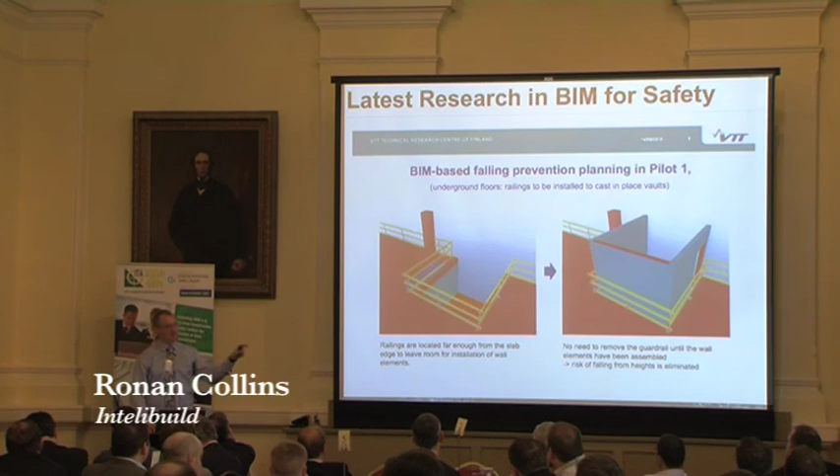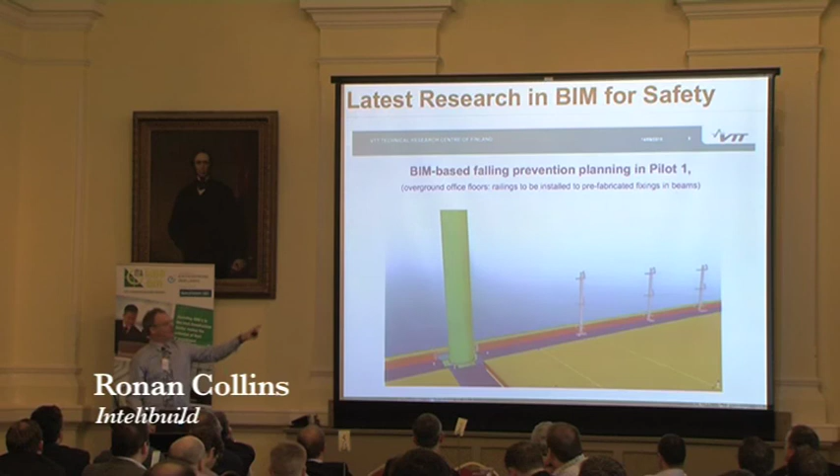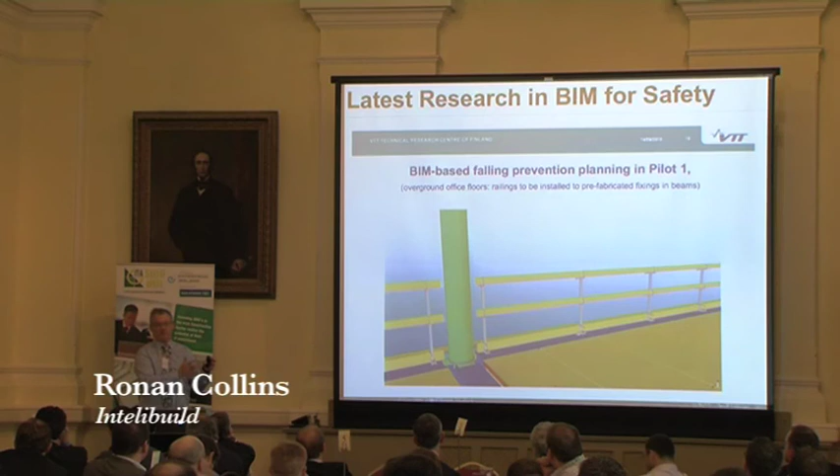So when they actually fabricate the steel, when they precast the concrete, all the fixings for the safety systems are pre-installed. So it's not a guy going around with a Hilti hammer gun, nailing stuff to the ground after the building's been put up. They're actually all pre-installed. So they can prefabricate the beams and the systems to quickly install safety systems. So the contractor's not just looking at BIM from a dollar point of view, they're actually looking from a safety point of view as well.

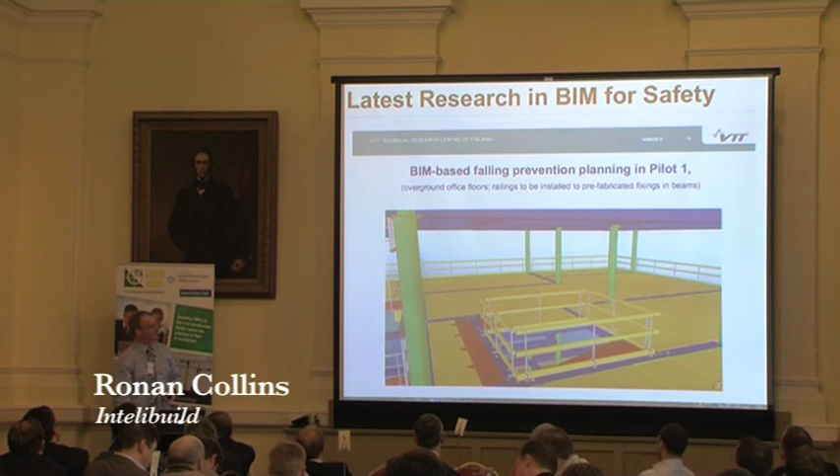And we've now got a contractor in Hong Kong thinking the same way. So they're looking at design for safety, putting in safety and everything else. And the reason I show this is I'm a big advocate of safety on site. I do a lot of work for the construction industry charity called the Lighthouse Club. And we're looking at ways of using BIM to leverage into this system.

So hopefully this morning's scatterbrained presentation shows you the importance of getting the right people in the right roles, getting the right process in terms of how you build the models, the level of detail in the models, when you model to a certain level of detail, how you do the clash analysis, how you report the clashes, and then how you go through the coordination and the collaboration stuff.

And I'll leave it up to the vendors and everybody else to tell you about the power that's required. If you are investing in BIM, my only advice is buy the most powerful, fastest computers you can find and invest in them and run them off over 2 years and replace them every 2 years, because the technology is fundamental in terms of performance.